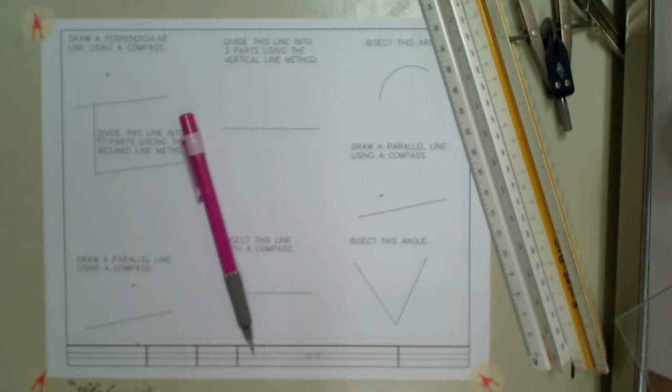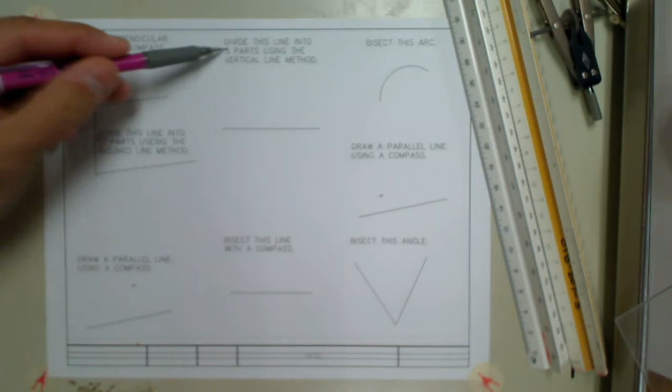Today we're going to talk about what we've already been covering. We covered perpendicular, parallel, bisecting arcs and lines and angles, and hopefully we're going to get through dividing a line into 11 parts or 3 parts.

There's a couple of different ways you can do it. Actually, when I created this worksheet, I showed them how to do the inclined and the vertical, but honestly you really only need one. So we're just going to do one version, and we're going to do the vertical method.

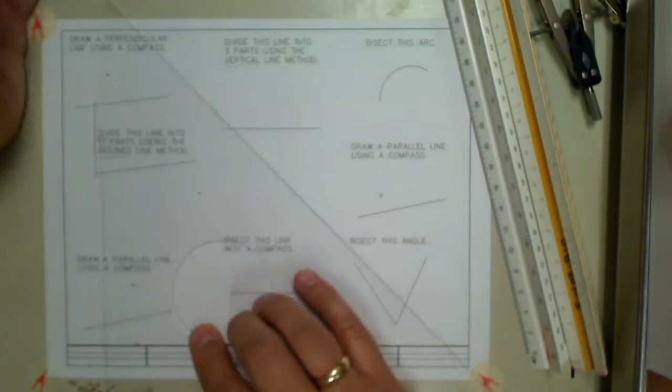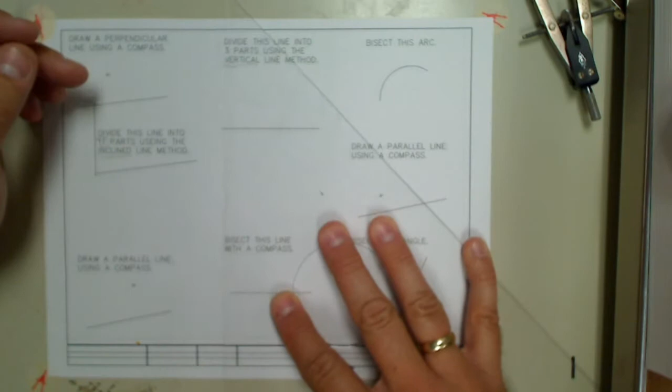Basically, all that means is you line up your item with your drafting machine here, and you make a vertical line. Now, obviously, this guy is not vertical, but that's still okay. So I got a vertical line there, and I'm going to go ahead and make my vertical line up here. We're imagining that I have a drafting machine, and that everything's square and perfect and beautiful, right?

Okay, so I have my two lines. The length of the lines don't matter. What matters is using scale. So the thing is, you got to figure out what scale - of course, depends on how many pieces.

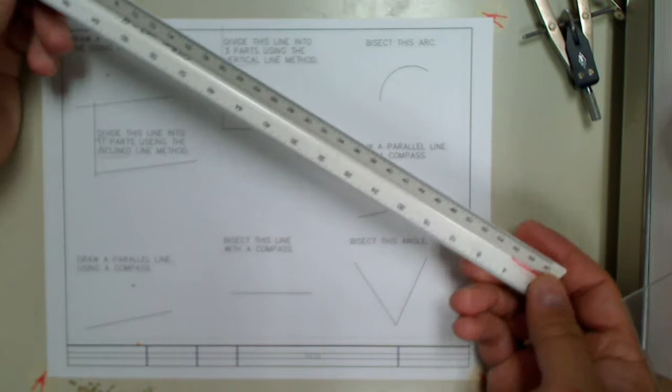Like for 11 pieces, I might need to use maybe a 50. 50 works. What I do is, that's 11, and then I try to get the 0 to line up, and it doesn't work. So maybe try 40. Alright, so my 0 is over here. As long as my 0 hits on this line somewhere, and my 11 lines up, like so. So I've got the 11, I've got the 0, and then basically you just mark every one of these so that you have your divisions.

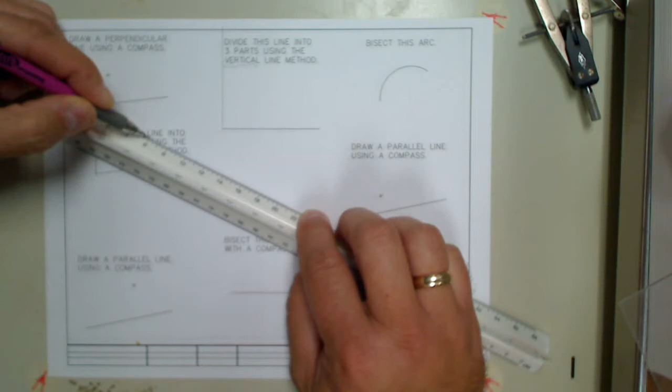The reason that I like to use the vertical line method is I don't have to set my drafting machine or worry about an angle, and basically I can just line it up with your point, and then you've got your pieces down here that you're making.

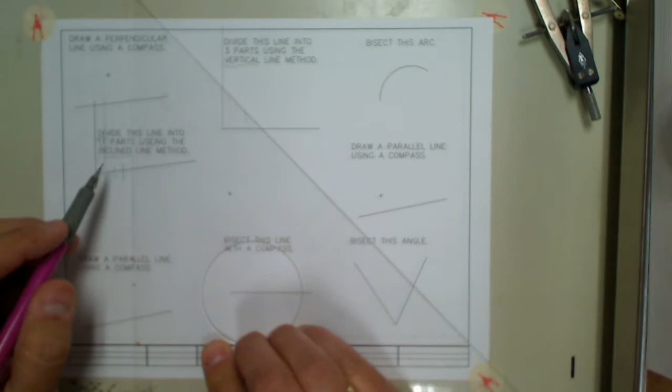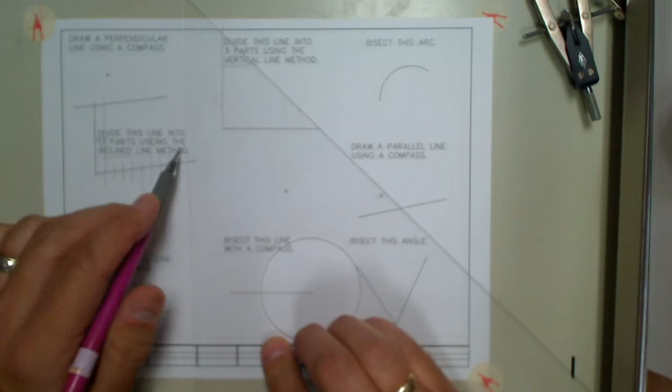Depending on how accurate I do this, and if I can find my little point, then make darker points. Anyway, so there you go. And I got mine all off there, but as you can see, they're pretty well evenly spaced.

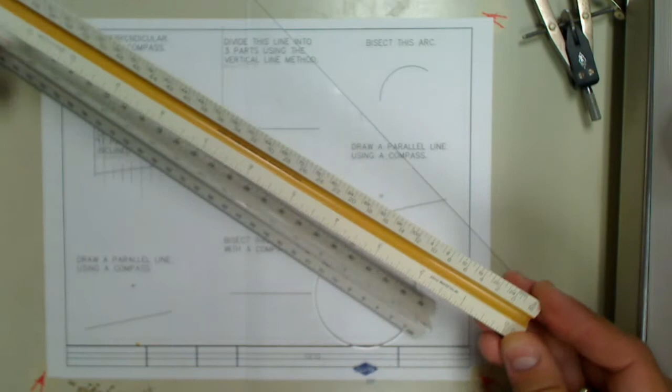Alright, so the cool thing is if you need to divide something into pieces, here's the way you can do it. You just need to make sure that you pick whatever scale, whether you're using this, or a measuring tape, or the architect scale, whatever it is. Just make sure that you get the 0 on the end of the line, or one end of your measurement on the end of the line, and the other one on your vertical line, and you're good to go.

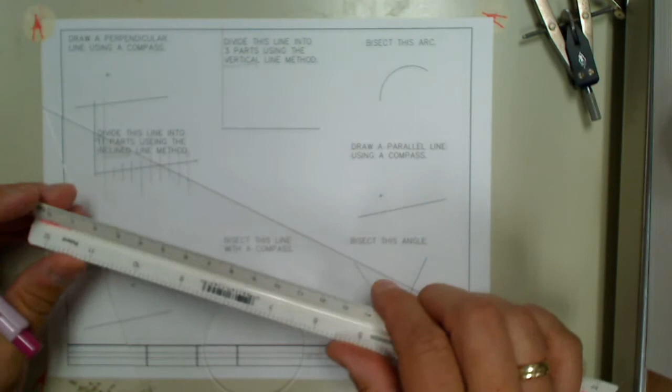So on this one up here, what we want to do is, honestly I think you could just use the 10 scale on this one. So I take my 3, right, there's my 3, and apparently I can't do it this direction because of my desk, so I'll do it this direction. So there's my 0, and we'll pivot on that, and there's my 3.

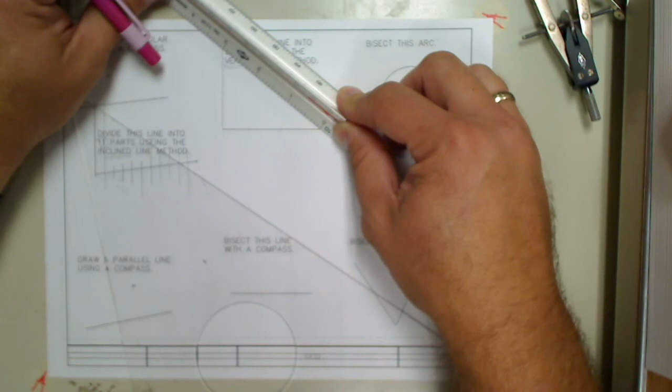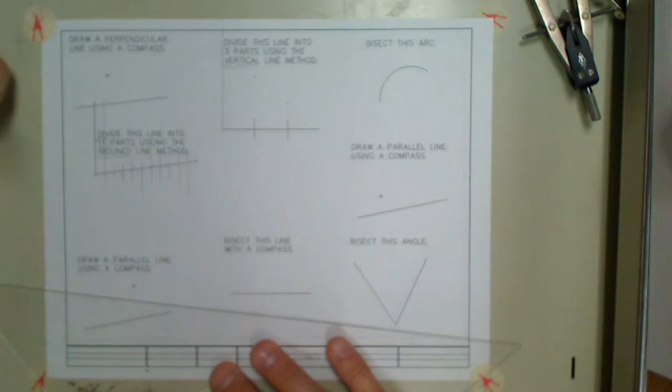Main thing is you have to make sure that your line that you drew is long enough so that you can hit it, or line up with it. So there you go, and then you take your square and so on, keep things square and nice and perpendicular, and there it is. So now we've got 1, 2, 3 there, we've got 11 here, and that's how you divide a line into pieces. So that's all we need to do for right now, and we'll see you on the next video.